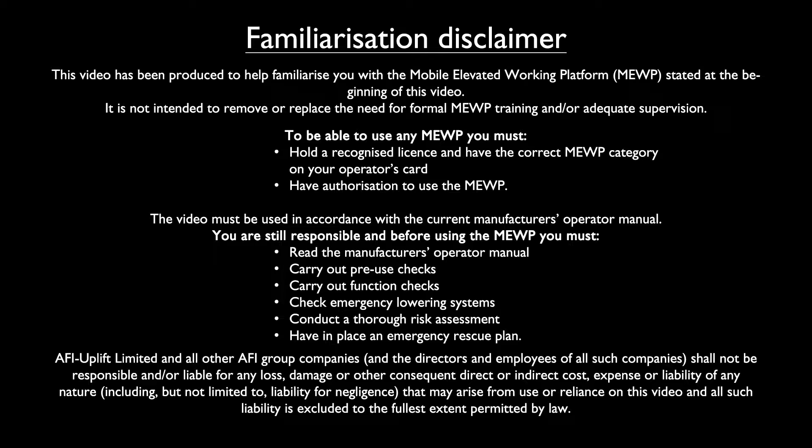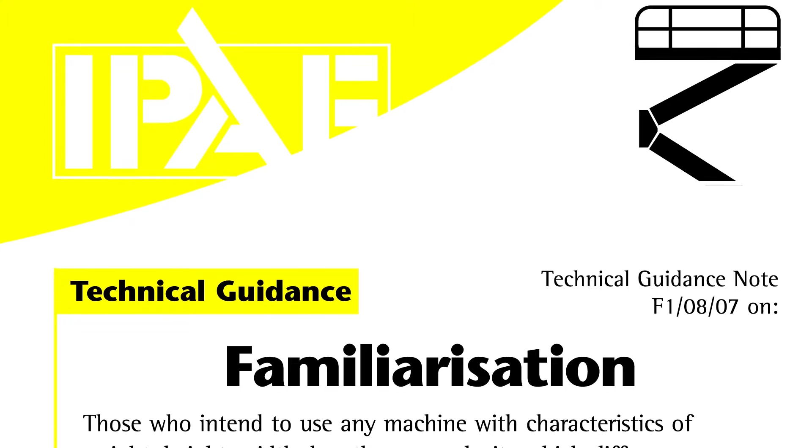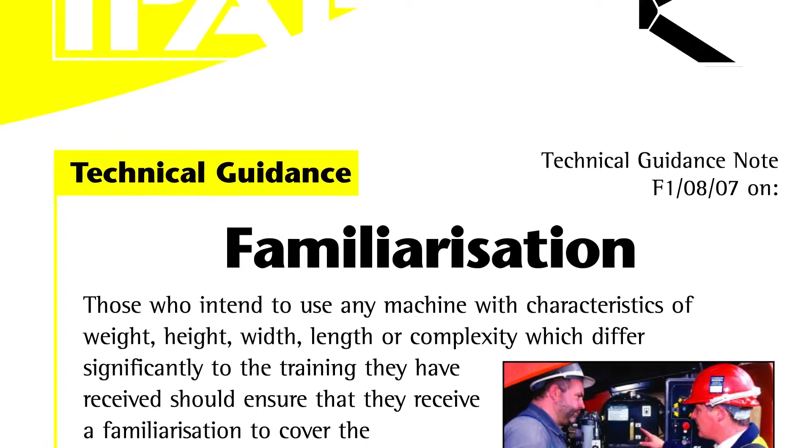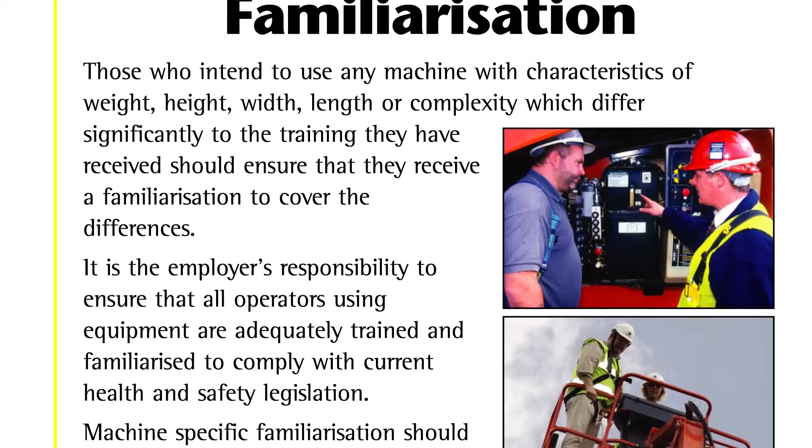Those who intend to use any machine with characteristics of weight, height, width, length or complexity which differ significantly from the training they have received should ensure that they receive a familiarisation to cover the differences. It is the employer's responsibility to ensure that all operators using equipment are adequately trained and familiarised to comply with current health and safety legislation.

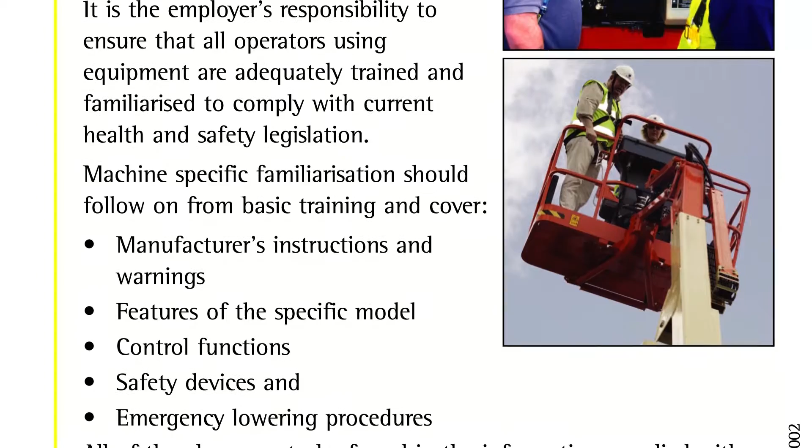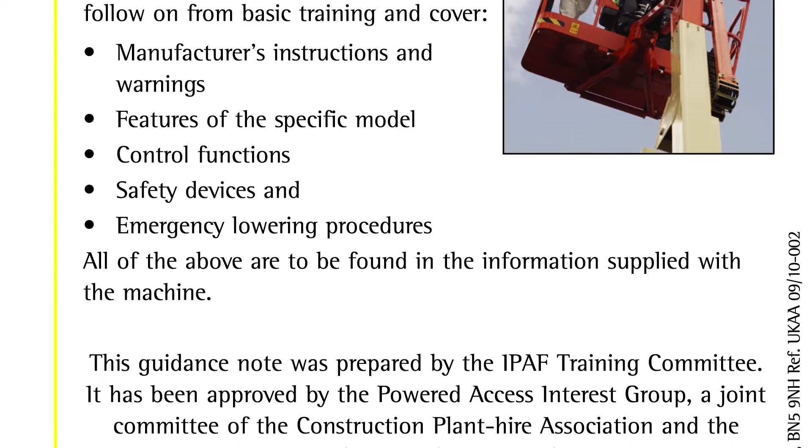Machine-specific familiarisation should follow on from basic training and cover the manufacturer's instructions and warnings, features of the specific model, control functions, safety devices and emergency lowering procedures. All of the above are to be found in the operator's manual supplied with the machine.

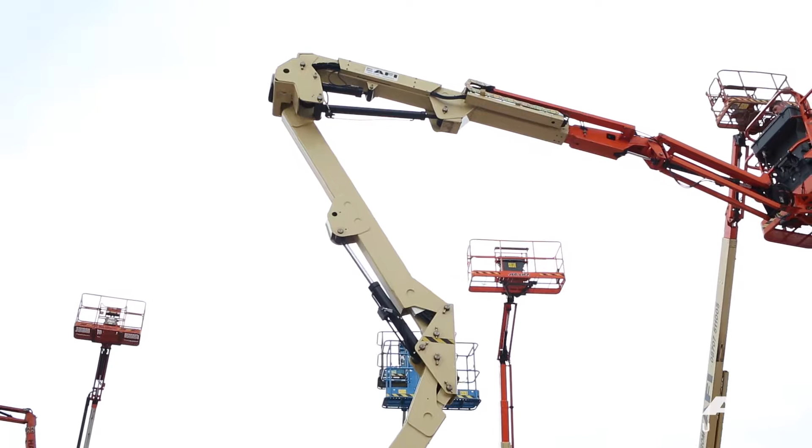The machine is a 45-foot articulated platform with jib. The machine is a bi-energy, meaning it is battery powered but has an engine which will charge the batteries once they drop to a certain level. The maximum capacity is 230 kilograms or 500 pounds. Maximum travel gradability is 30%. Maximum side slope is 5 degrees.

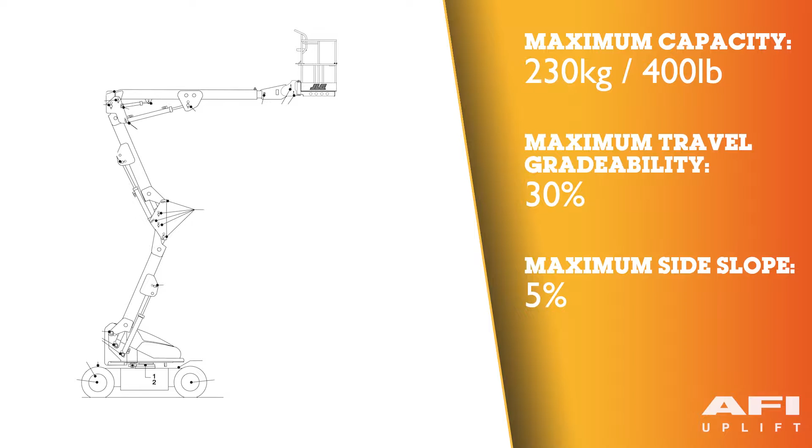Maximum platform height is 45 feet or 13.72 metres. Maximum working height is 51 feet or 15.54 metres. The up and over platform height is 25 feet 3 inches, 7.7 metres. The maximum horizontal platform reach is 23 foot 9 or 7.24 metres. The stowed height of the machine is 6 foot 7 inches or 2 metres. Maximum length of the machine is 21 foot 2 inches or 6.45 metres.

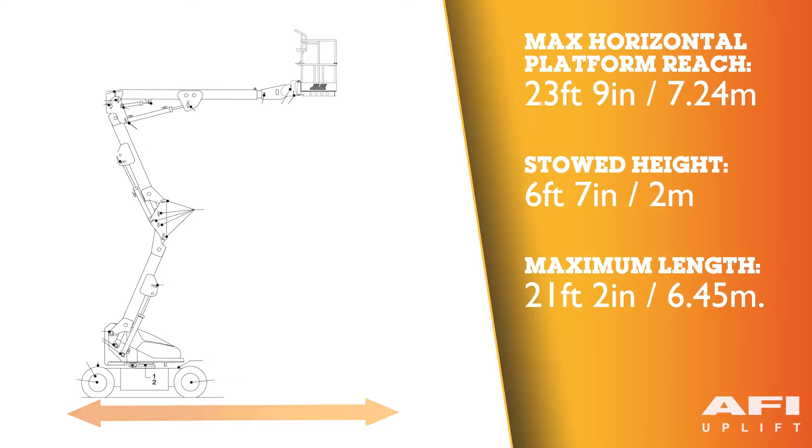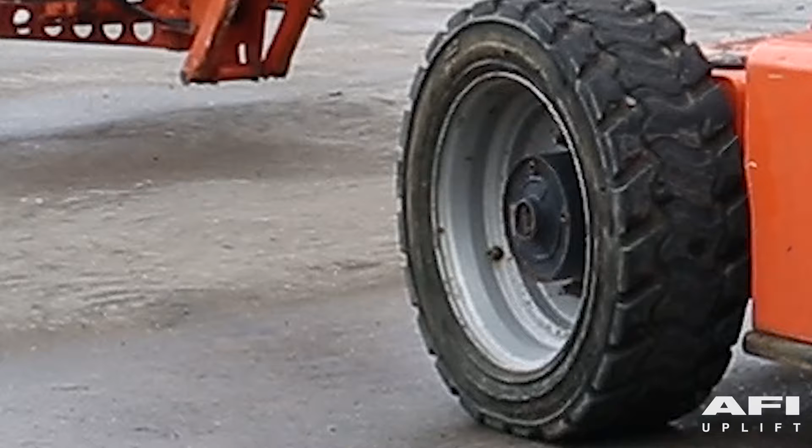The gross weight of the machine may vary. Please check your serial plate and operator's manual for exact details. The type of tyre fitted to the machine is a foam filled tyre. This will be indicated by a bolt opposite the valve in the tyre.

Parts of the machine: Platform control console. Platform. Upper boom. Mid boom. Lower boom. Turntable. Frame.

Steer wheels. Drive wheels. Battery box. Foot switch. Ground control console.

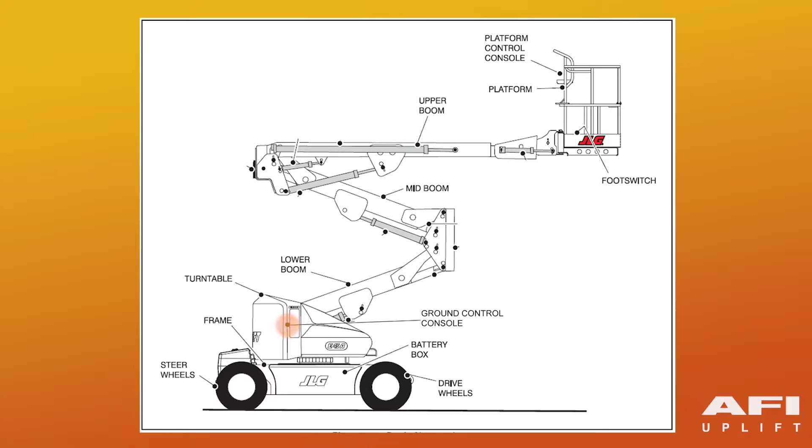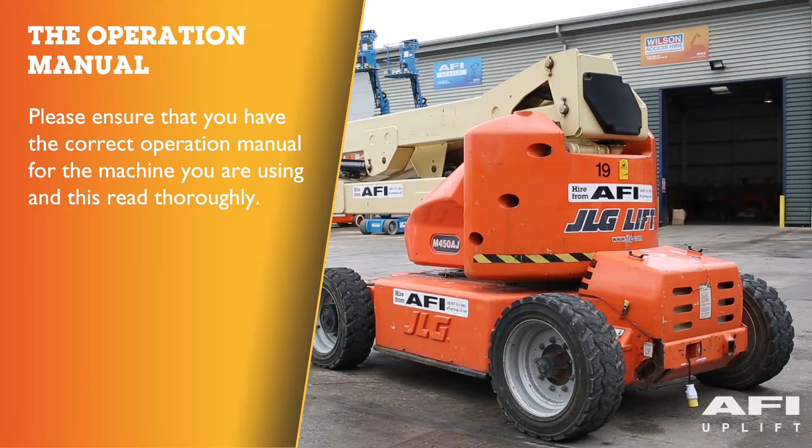The operating manual will be located in the black box in the platform. Please ensure that you have the correct manual appropriate to your machine and that you familiarise yourself with the table of contents in the manual.

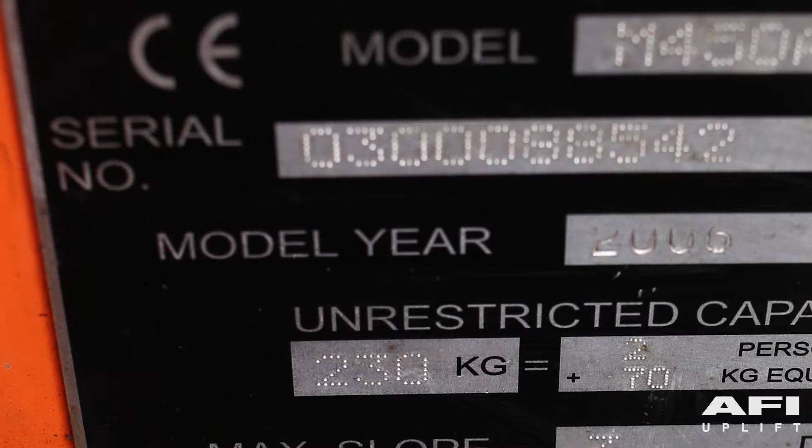Identify the thorough examination plate and ensure that the machine is in date. Locate the manufacturer's data plate and ensure that the serial number corresponds with the thorough examination serial number.

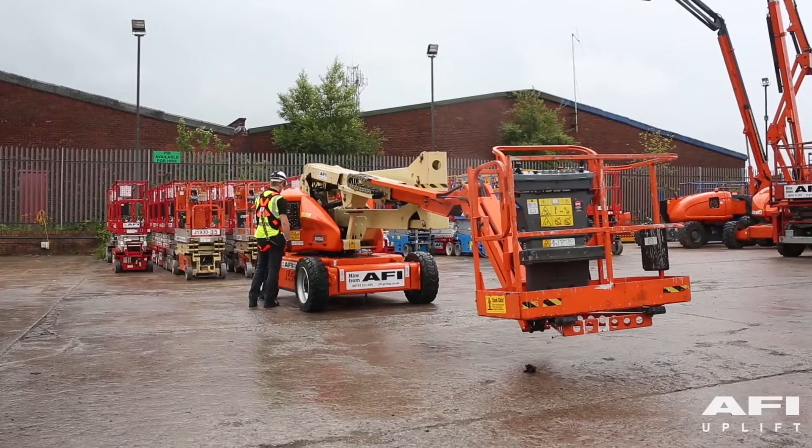Before a machine is put into operation, it must be carefully inspected for any evidence of damage and inspected periodically thereafter. If you do find a fault, isolate, tag and report the machine. Do not attempt any repairs to the machine.

Inspect hydraulic lines for any leaks, damage and security. Check all tyres and wheel assemblies for loose, worn or damaged parts. Check components and hardware for security. Check the platform and control console for any damaged, loose or missing parts. Make sure everything is secure.

Check all control switches and levers for any damage, loose or missing parts. Ensure that levers function properly. Check the access gates, hinges, catches and any latches for proper operation, damage and security. Check battery for damage, loose or missing vent caps, electrical connections and tightness.

Opening the canopy, check the engine bay. Check the engine for oil leaks, oil level, check for any loose or missing parts, look at throttle connections and linkage, inspect fuel lines for any damage, leaks and security.

Before carrying out any work on batteries, ensure that you're wearing the correct personal protective equipment in accordance with any risk assessment and safe system of work.

Hydraulic ramping. Your machine may have hydraulic ramping built into it by design. This means that the machine may not stop immediately when a controller is released.